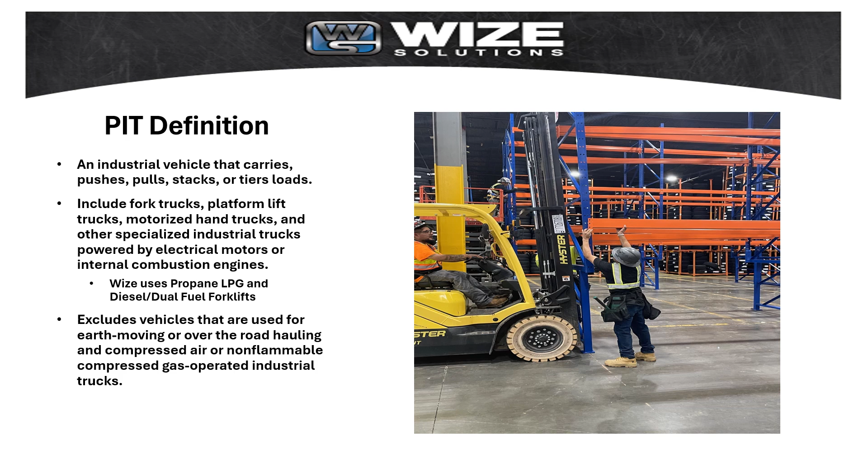First thing, it is against the law for anyone under 18 to operate a forklift. This is both a state and federal law.

These battery-operated electric forklifts are typically used in warehouses where lack of ventilation makes the use of propane, diesel, or gasoline-powered forklifts a carbon monoxide hazard.

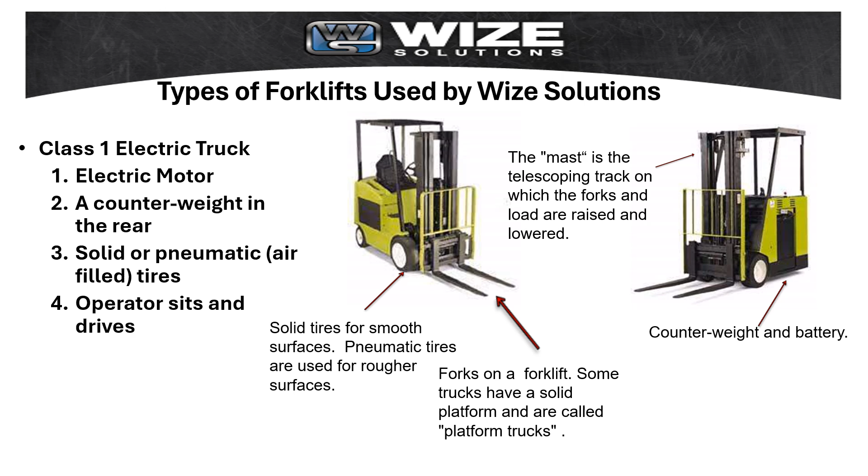These specialized electric forklifts are used primarily in warehouses with high stacks of stored goods. Sometimes here at Wize Solutions, at certain sites, these types are used.

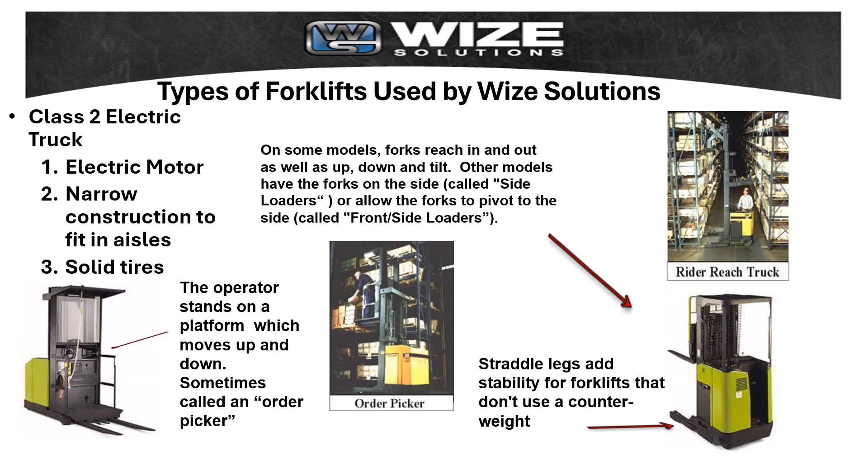This is another common type of forklift often used outdoors, except here at Wize we have an approved IH program for certain models to be used both inside and outside. Check with myself for specific job, location, and general contractor guidance.

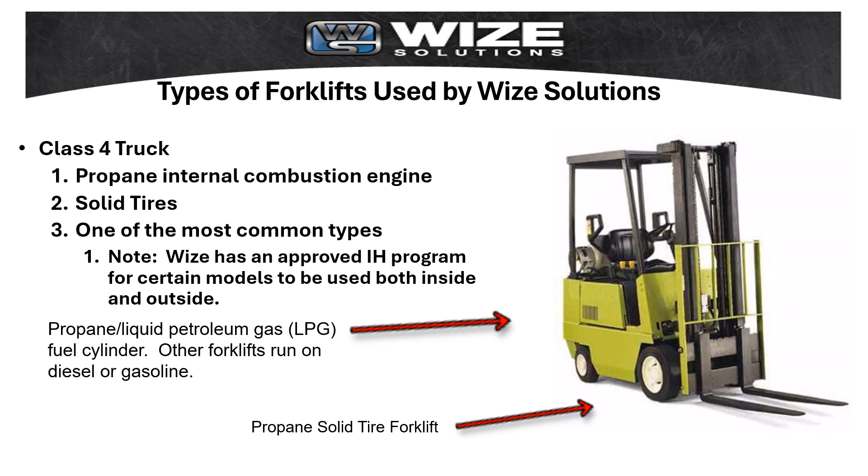This is another common type of forklift often used outdoors, but here also at Wize we have an approved IH program for certain models to be used both inside and outside. Check with myself for specific job, location, and general contractor guidance.

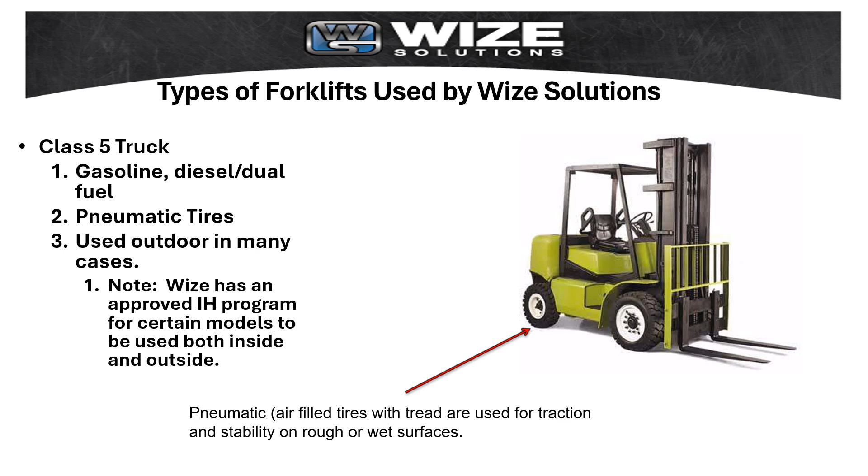These heavy-duty vehicles will not be covered specifically, but most of the information in this course would apply to them as well. Here at Wize, this also falls under the IH program. Certain models can be used inside if approved by the general contractor. These come in handy specifically for high capacity requirements in some of our material handling.

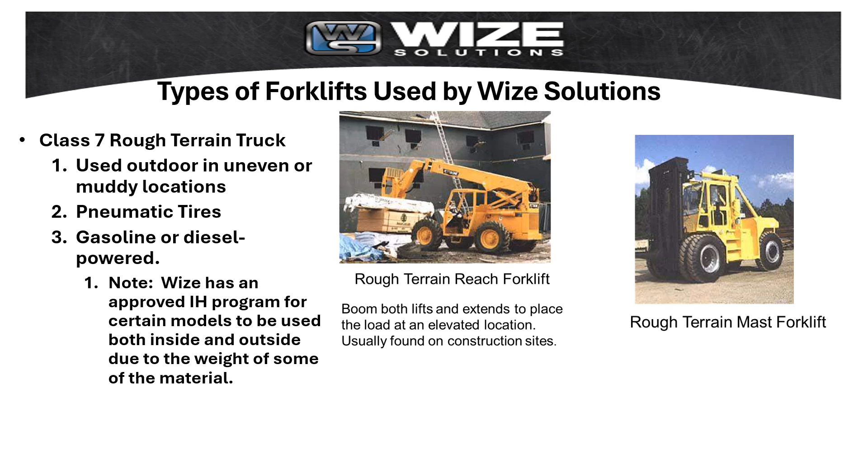These classes are types of forklifts that Wize Solutions does not use on the job site. If that ever changes, the training and PIT program will be updated.

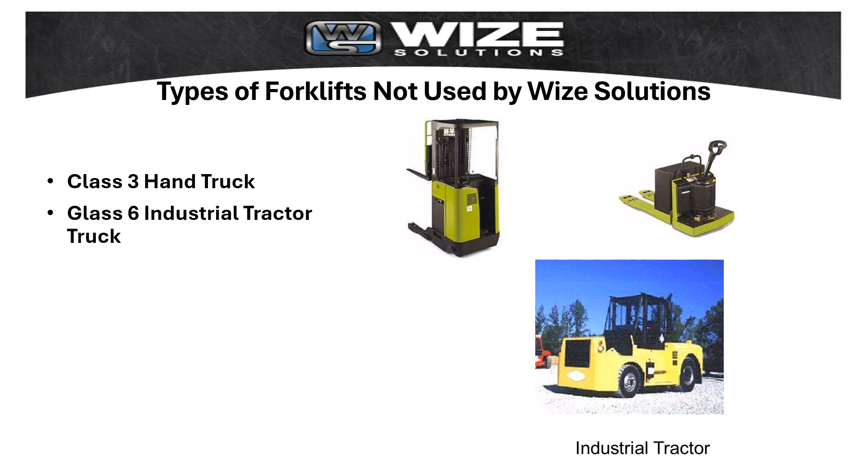While the average automobile weighs around 3,000 pounds, the average forklift weighs around 9,000 pounds. Also, forklifts are heavier in the rear to counter the weight of items being carried in the forks. And while cars have brakes on all four wheels, most forklifts only have stopping power in their front drive wheels. For that reason, forklifts are harder to stop, so they should be driven slowly.

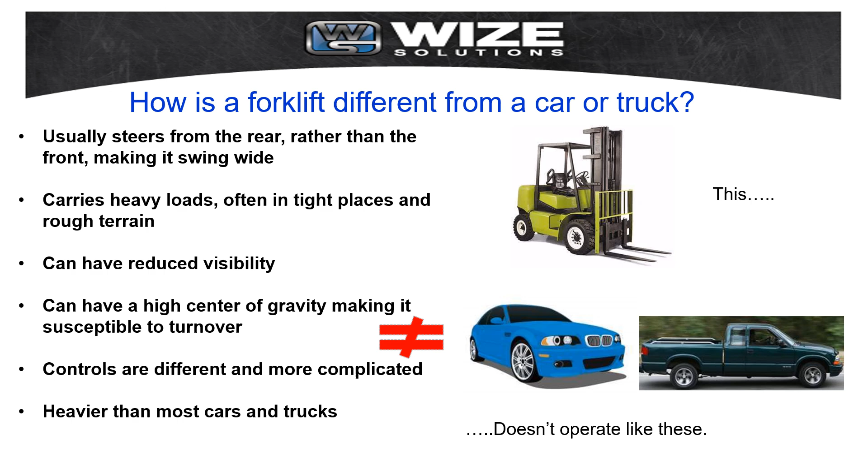Sometimes, older forklifts will develop a leak of hydraulic fluid. Without sufficient hydraulic fluid, the forks will not operate properly, especially with a load, and a puddle of hydraulic fluid on a cement floor is a slipping hazard. Your supervisor will go over this with you during your hands-on training.

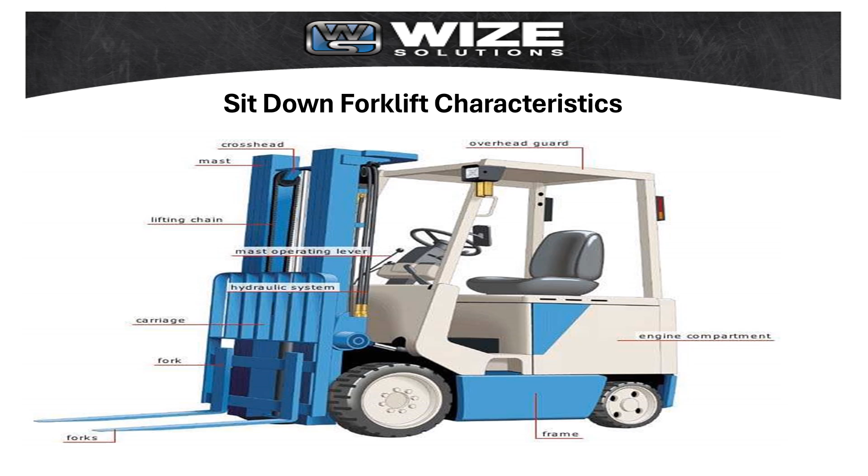The nameplate gives important information about the capacity of the forklift. These must be readable at all times so anyone who operates the forklift will know its capacity and not overload it. When I am on site, one question I will ask to test the operator is: do they know the weight of the load they are carrying, and is it within the load capacity of the forklift they are operating?

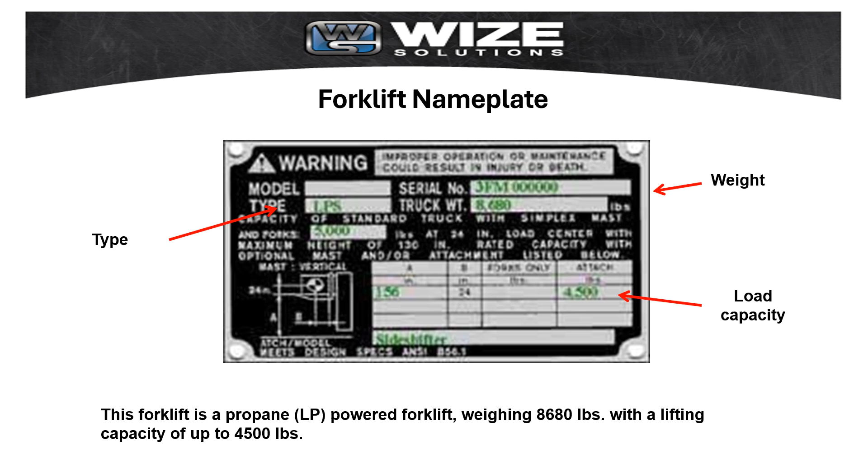The forklift manual will be present on the forklift. I'll be checking with the forklift operator when I am on site.

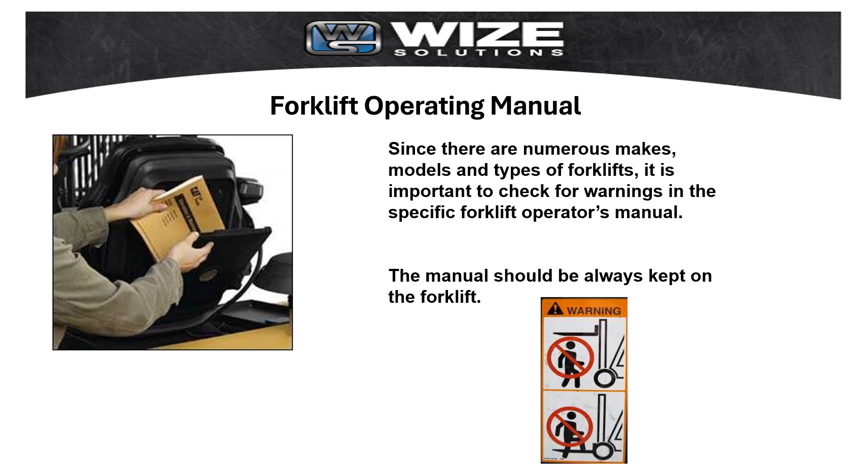Wize Solutions forklift operators must know the forklift stability triangle. They must know the boundaries of that stability triangle. As the load is raised up and away, the center of gravity also shifts up and away from the middle of the forklift. If it moves outside the triangle formed by the front wheels and the center of the rear axle, the forklift will tip forward or fall to the side.

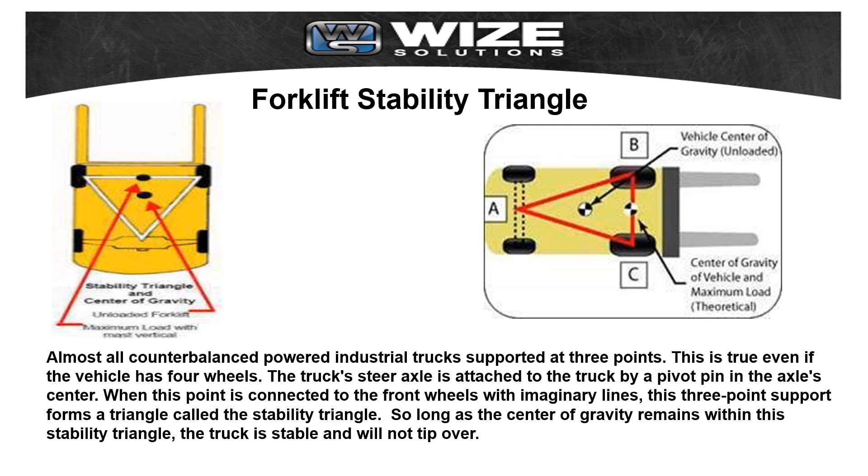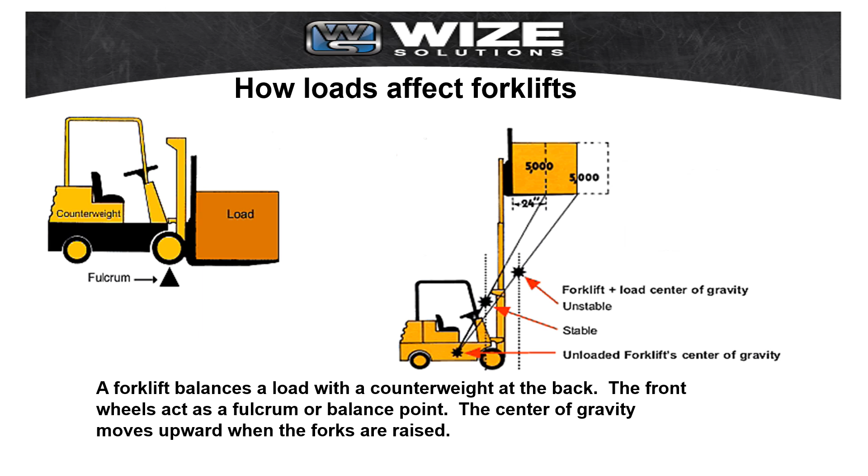Wize Solutions forklift operators must always know the condition and position of their load. As the load is raised up and away, the center of gravity also shifts up and away from the middle of the forklift. If it moves outside the triangle formed by the front wheels and the center of the rear axle, the forklift will tip forward or fall to the side.

As you can see from these illustrations, the center of gravity of the load should be as close to the forklift wheels and mast as possible.

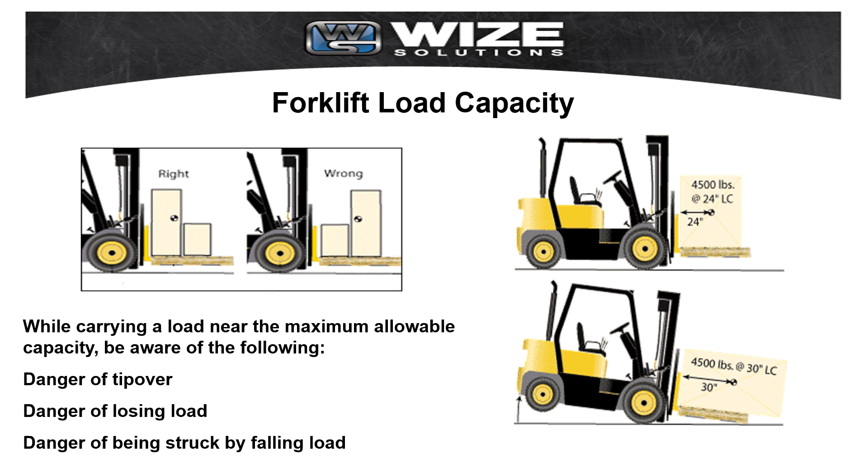In addition to the points on this slide, you should not pick up a load with just the tip or front part of the forks. Place the forks all the way under the load and then tip it back slightly. You may need to tilt the forks forward slightly to get under the load and later to deposit it, but all other times the forks need to be tilted back.

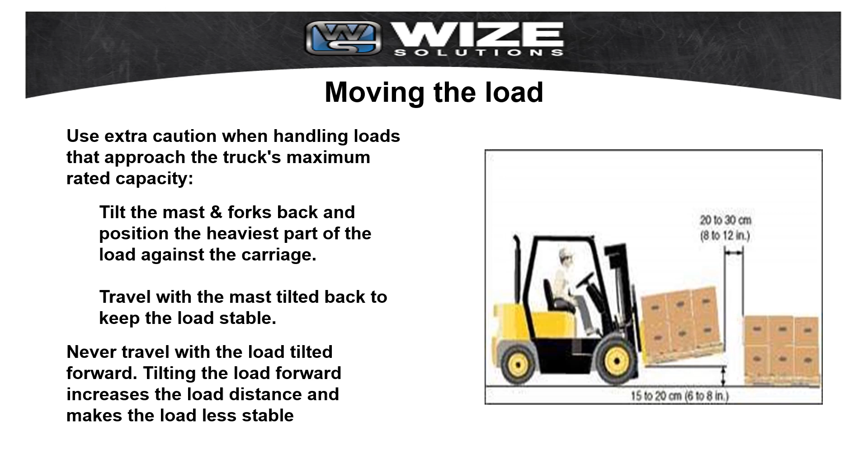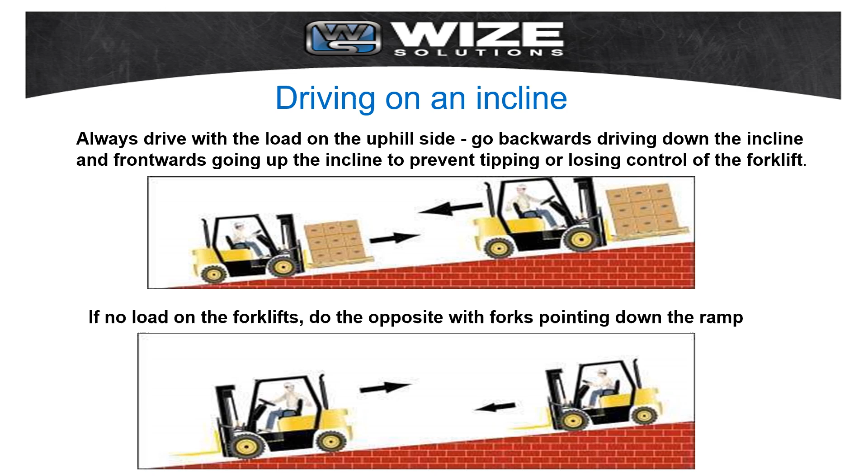When you drive on an incline with a load, always have the load on the uphill side. It's especially important to tilt the load backward and keep it low. Raise the forks just enough to clear the surface.

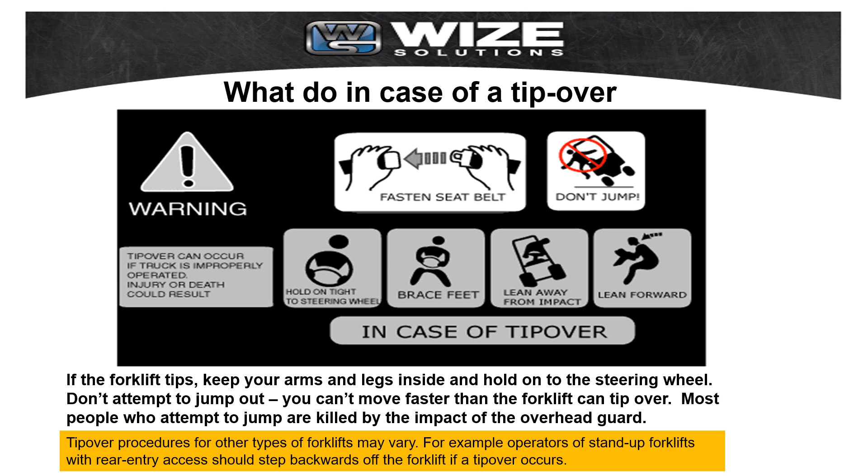Forklift fatalities have occurred when the operator was either thrown out of the forklift or tried to jump out when the forklift overturned. Seat belts prevent that. Keep your seatbelt on.

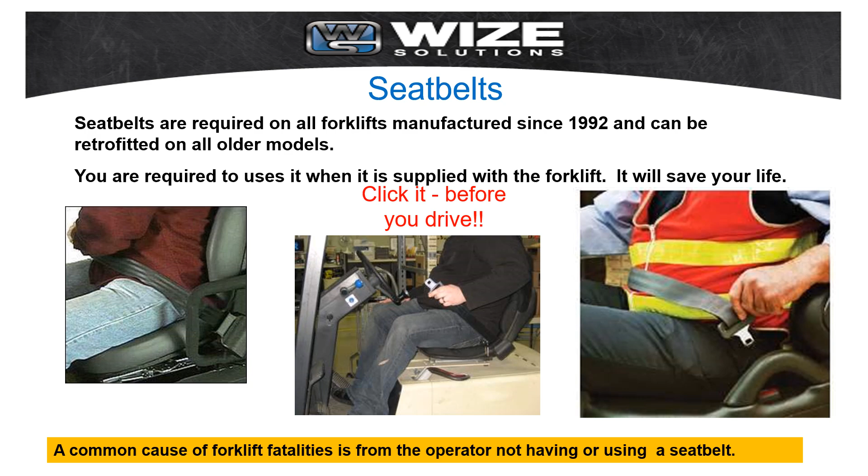Wize Solutions will document the pre-shift inspection if the general contractor requires it. OSHA does not dictate an actual documented inspection; however, they do require a pre-shift inspection.

Therefore, Wize will conduct pre-shift inspections prior to operations daily, as indicated in this training and the hands-on training your supervisor will go over with you. If the general contractor requires a pre-shift inspection, use the Wize Solutions Cognito Equipment Inspection Form or a form provided by the general contractor.

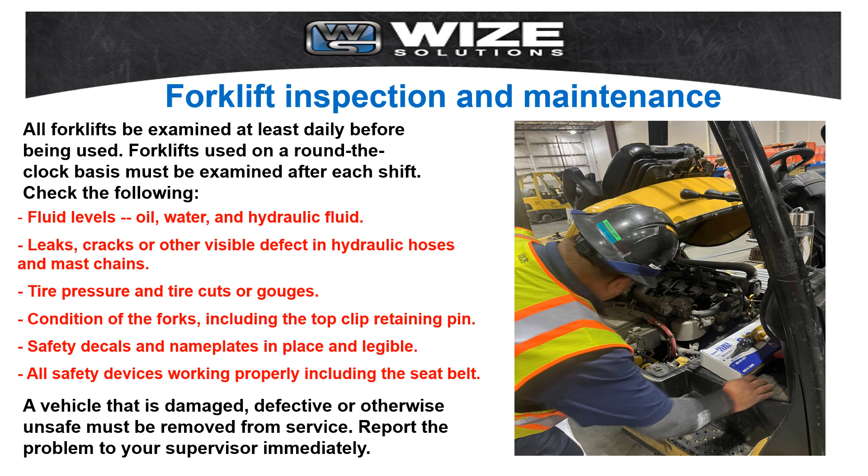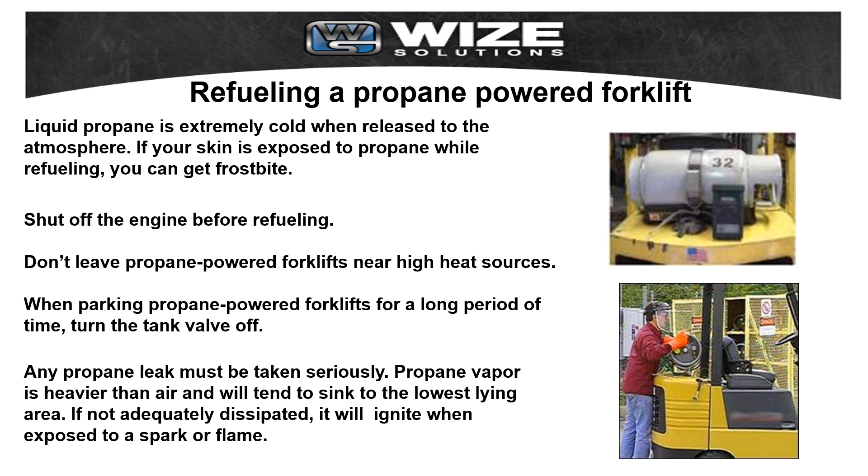Some companies may have a propane cylinder exchange system where a propane vendor supplies full cylinders in exchange for empty ones. If you switch out empty cylinders with full ones, just remember to make sure all valves on the cylinders are closed. Your supervisor will go over changing out the propane tanks during your hands-on training.

If you have to change or charge batteries on your electric forklift, you could be exposed to hazards like burns from battery acid or fire from hydrogen gas. Because of their weight, batteries are typically lifted with a hydraulic hoist. If you are the one that has to do that, be sure you know how to operate the hoist correctly. Your supervisor will cover this in your hands-on training.

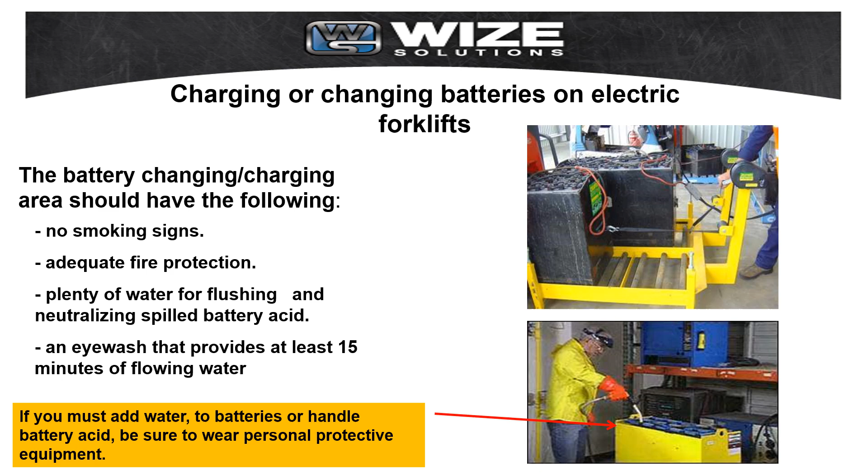Using an unapproved attachment can alter the forklift's lifting and balance characteristics and lead to the forklift overturning. The forklift must be marked in some way to show the weight of the attachment. This is usually found on the nameplate, unless it has been altered by a user without consulting the manufacturer. Doing so is actually a violation of forklift safety regulations.

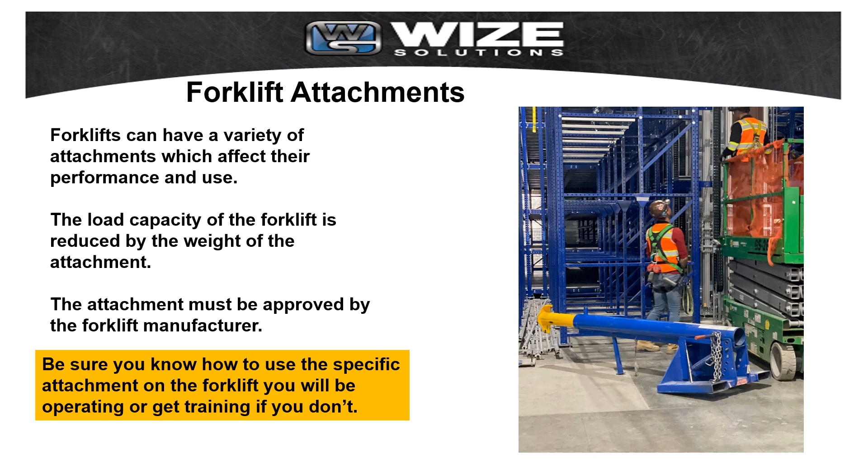Wize Solutions will tape off the work area. It is the forklift operator's responsibility to always communicate with all traffic and personnel while on the job site.

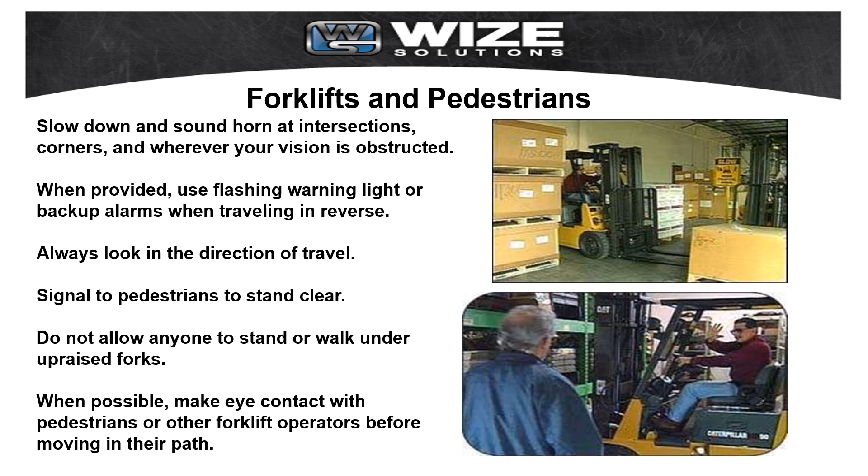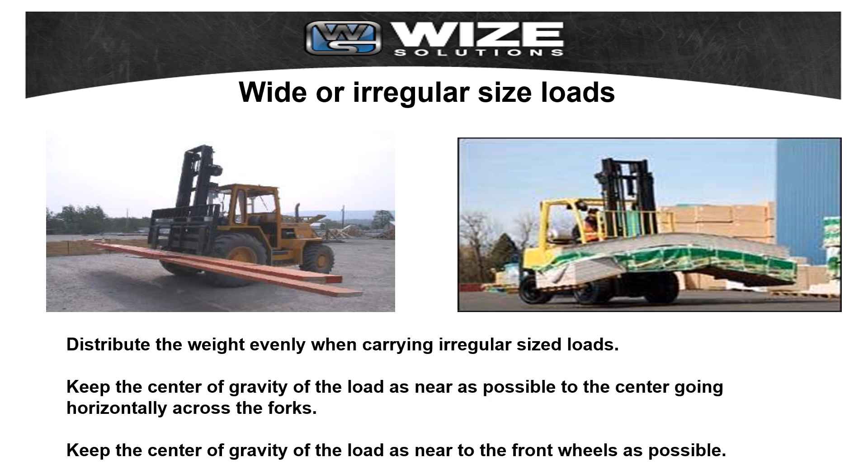This is a common occurrence here at Wize Solutions while on the job site. The forklift operator will have to demonstrate proficiency in maneuvering irregular loads to the staging area for the materials prior to installation.

Wize Solutions does not authorize anyone except a licensed forklift operator to ride on the forklift. Forklift operators must be attentive to all blind spots. Walk the area first prior to running through.